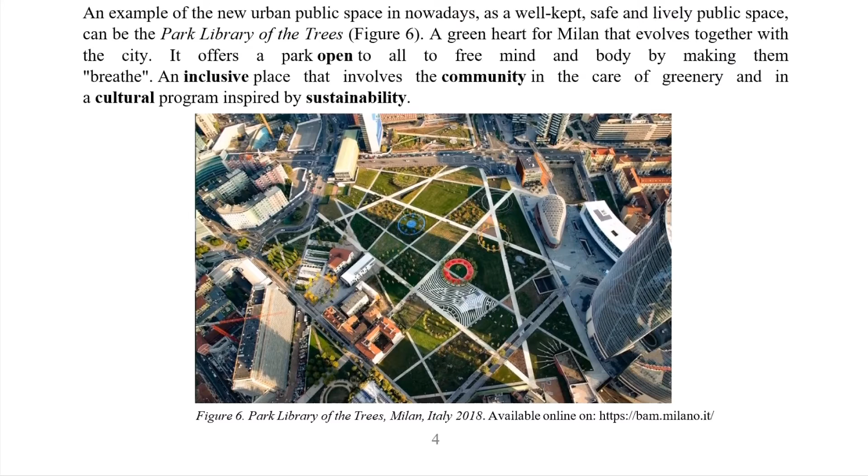Then, an example of a new urban public space nowadays is the Park Library of the Trees in Milan, Italy, that offers an open park, an inclusive place that involves the community in the care of greenery and a cultural program inspired by sustainability.

Chapter 3 talks about rules and functions of urban squares. We can see that functional activities in the square are important for their vitality, and therefore visual attractiveness plays a substantial role.

According to Mumford, the primary function of cities is the acculturation and humanization of its inhabitants, and for this purpose public spaces are the essential tool in the city. Kostof defines some basic functions of urban squares as being part of the transport system, commercial activities, games and sports. In addition, public squares provide citizens with places for leisure and outdoor activities, and also have ecological benefit to the human and urban environment.

Well-designed public squares increase the visual landscape value and contribute to environmental aesthetic value. In addition, urban public squares also provide economic benefit for the community. It's a well-known fact that the existence of open and green areas increases real estate prices nearby. An example is Times Square in New York.

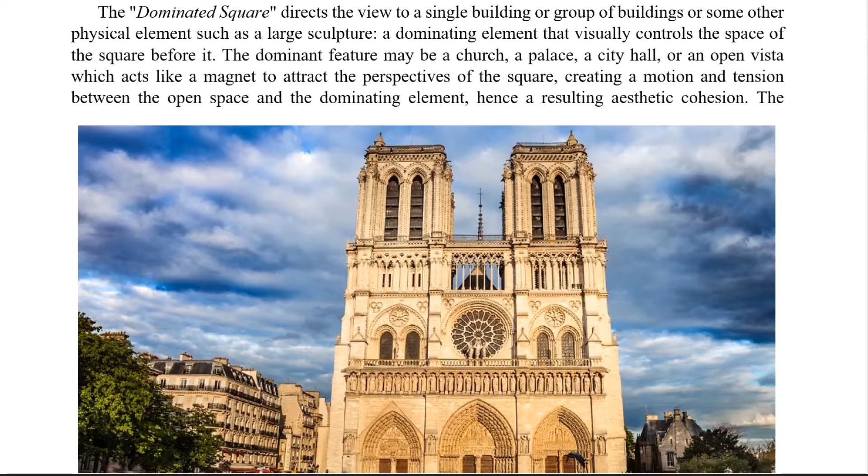This simplest form of public square is closely related in design to the architectural concept of the atrium of a Roman house. Another category is the dominated square, in which the dominant feature can be, for example, a church, a palace, or a city hall, or, for example, an open vista, which acts like a magnet to attract the perspective of the square. For example, we can take the Notre Dame Cathedral and Parvis of Paris.

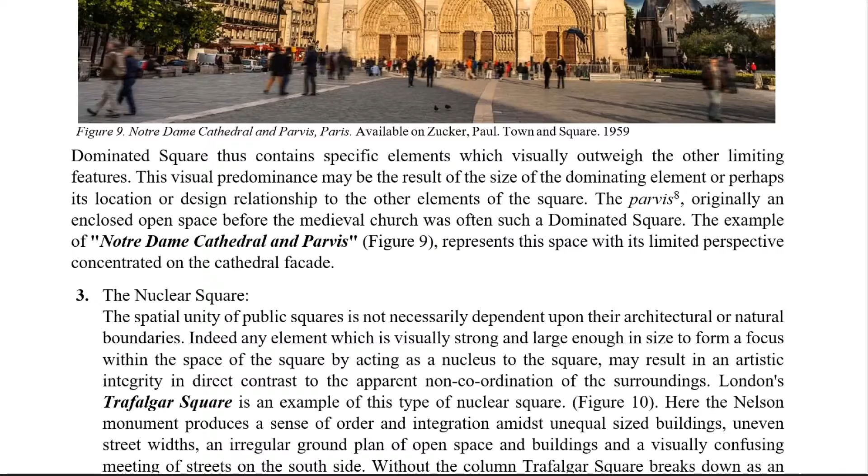The third category is the nuclear square, in which the spatial unity of public squares is not necessarily dependent upon their architectural or natural boundaries, but on any element which is visually strong and large enough in size to form a focus within the space of the square by acting as a nucleus to the square. An example is Trafalgar Square in London.

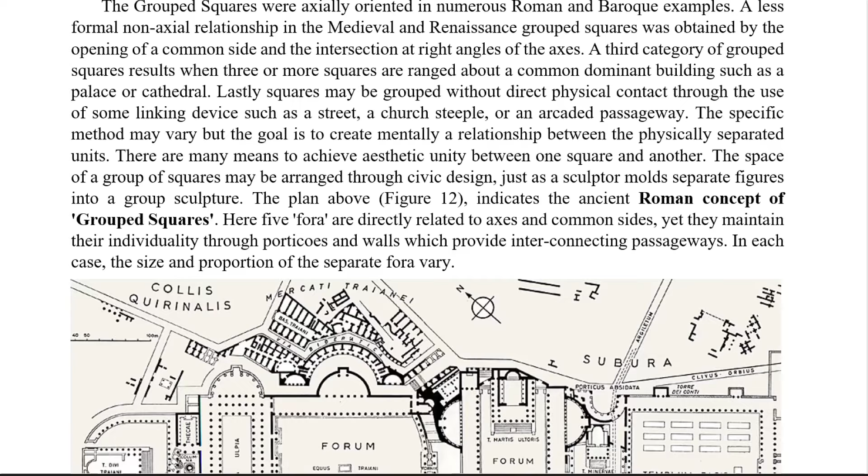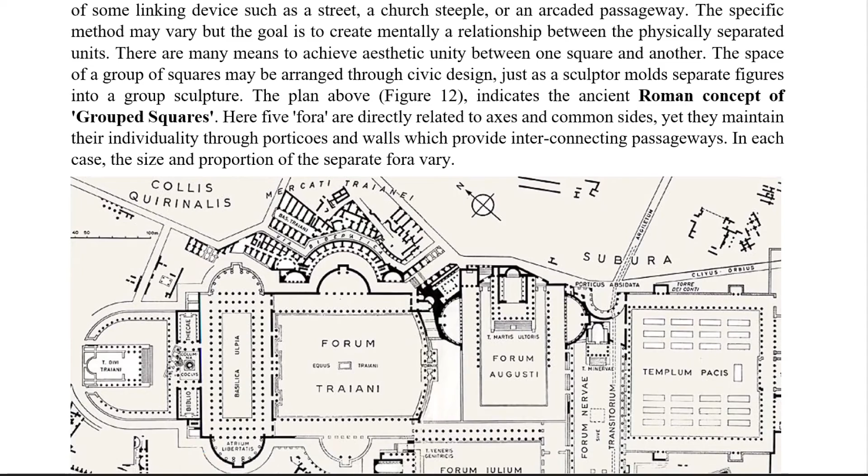And another category is the grouped square. They were axially oriented in numerous Roman and Baroque examples. There are many means to achieve aesthetic unity between one square and another, and the space of a group of squares may be arranged through civic design, just as a sculptor molds separate figures into a group sculpture.

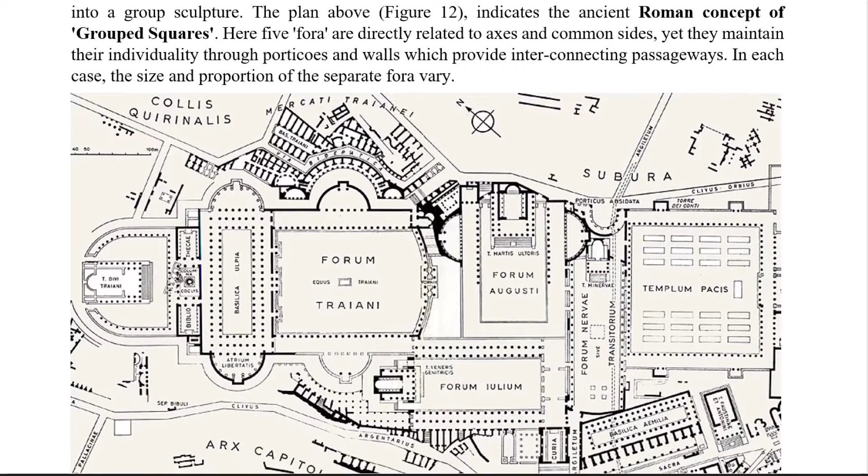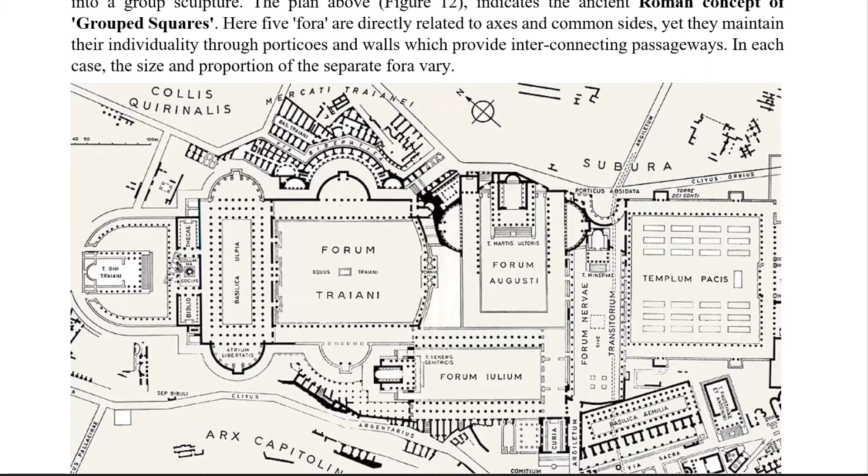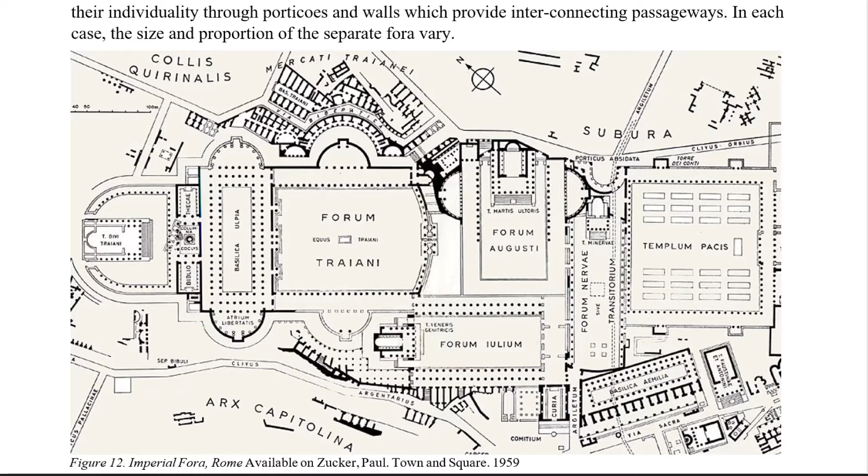This image indicates the ancient Roman concept of grouped squares, in which five forums are directly related by axis and common side, yet they maintain their individuality through porticos and walls, which provide interconnecting passageways. And in each case, the size and proportion of the separate forums vary.

The last category is the amorphous square, a term used to describe and classify so-called squares which are, from an aesthetic point of view, formless. To clarify the meaning of the term square, it should be noted that many open spaces formally have the title of square, even though they are just a crossroad, such as New York's Times Square.

Not each square can be easily categorized as closed, dominated, nuclear, or grouped, and can be qualified with multiple classifications. We can consider the case of Piazza San Pietro in Rome, Italy, which shows how this plaza can be classified as each of closed, nuclear, dominated, and grouped.

Then we can have a functional classification, in which every square has a number of purposes and social functions that relate to the very ethos of community. Because the social function of the square extends to such a comprehensive range of urban activity, a functional classification has been devised by G.M. Peter.

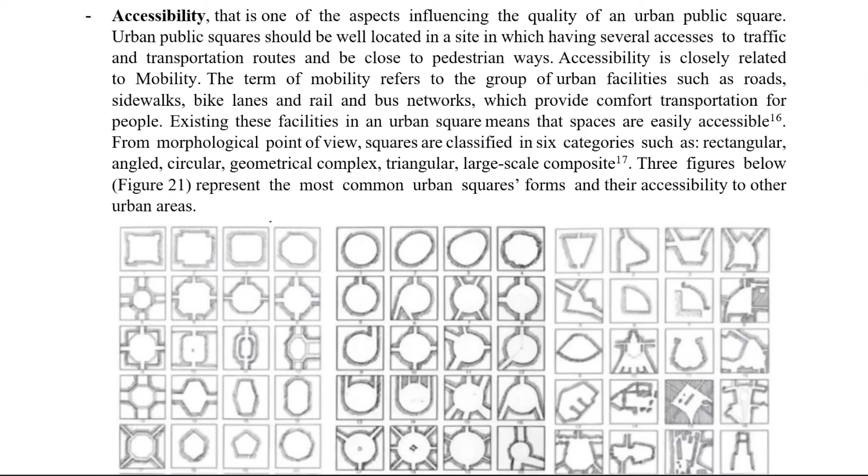Regarding the physical aspect of each urban square, we should consider the size, the accessibility, the furniture, and the beauty. In terms of ecological aspect, due to the rapid growth of urban communities, the issues of microclimate and temperature in urban public space have been influenced. So ecological aspects are important in designing urban squares because they are very vulnerable to weather conditions.

This means the usage of urban squares is dependent on users' thermal comfort, wind comfort, and sun comfort. Since a square is ecologically comfortable, it can attract visitors and users and consequently give benefits to city life. So the following factors represent the ecological aspect of sustainable urban squares: thermal comfort, wind comfort, and sun comfort.

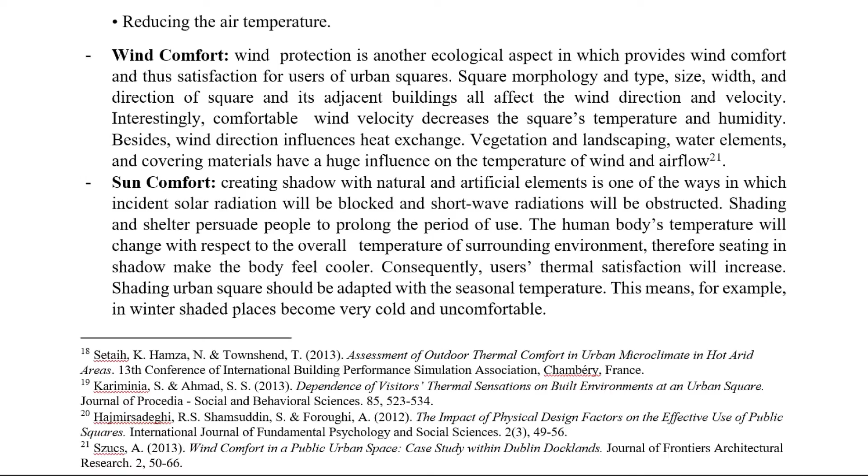Then, when is a square socially sustainable? Social sustainability refers to strategies in which social cohesion and social interaction are emphasized. There are different definitions for social sustainability, such as the ground of equity and democracy, addressing basic needs, and preserving social values and tradition.

However, there is a consensus which introduces social sustainability as a combination of underlying themes, which provide social and human well-being. It's important to know that political and economic situation have also always had a profound influence on social sustainability.

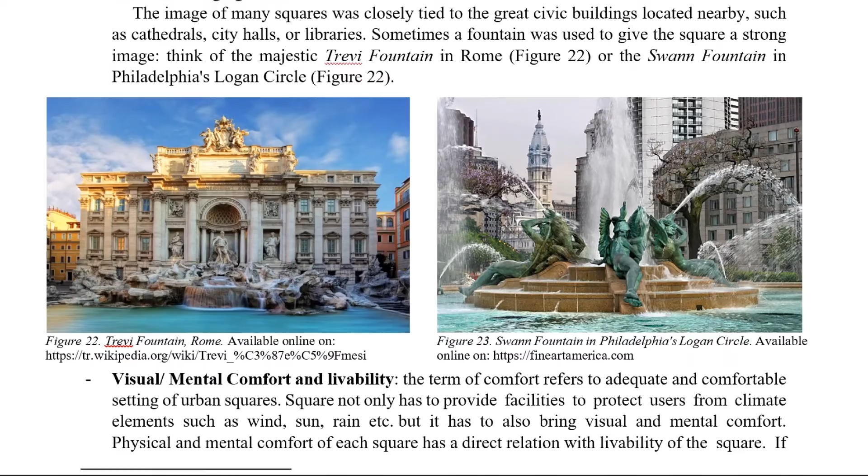To understand the meaning of social sustainability in urban public squares, the following issues are considered: first of all, identity; then visual and mental comfort and livability; and also equality, safety and security, and flexibility in activities.

Now we can talk about when is a square economically sustainable. Urban public squares have also been a tool for subsistence of many people. Well-designed squares are a destination for many tourists, as long as social activities and physical aspects of each square are systematic and useful, the economy of the urban square is more secured.

Urban squares should be commercially oriented to contribute to economical profit and economical growth. In other words, to make sure that the square is economically sustainable, there has to be good management and monitoring to support the diversity of social interaction and physical structures.

Therefore, social, cultural, and ecological aspects of urban squares will lead to vibrant economic development, which is based on local self-reliance rather than government resources. Urban policy makers try to enhance the quality of urban public space and living environment to attract investment and economic boost. The following are some examples around the world about squares that I will better explain in the matrix.

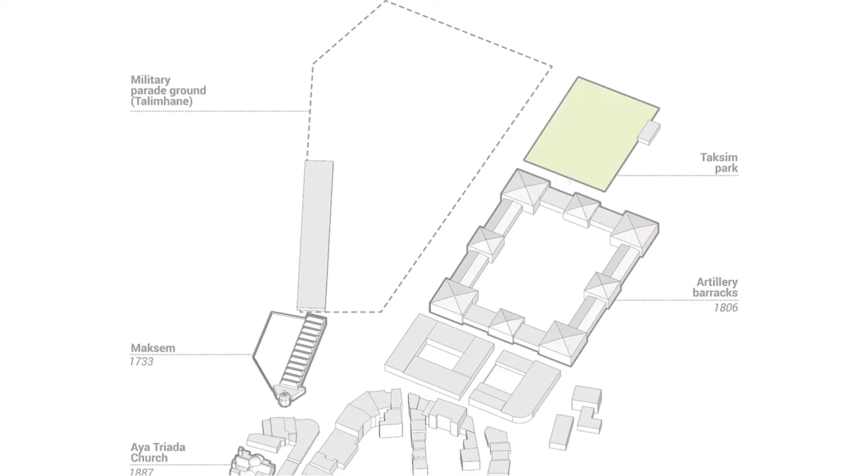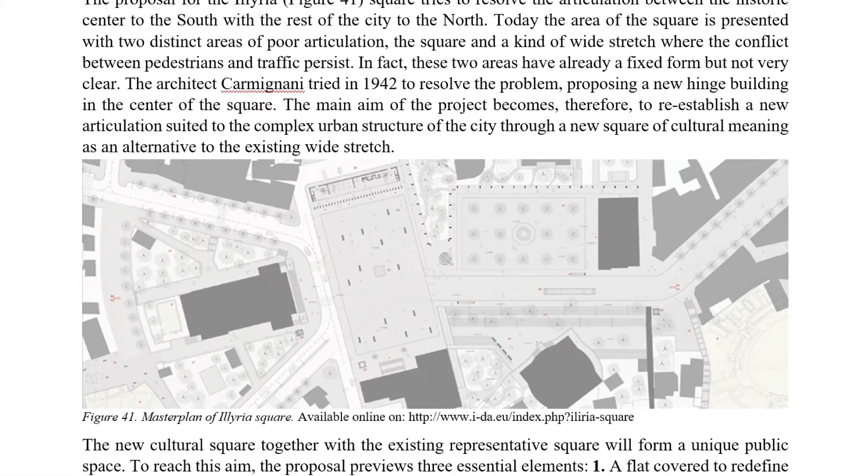Here we can see the images of San Marco Square in Venice, Italy; Piazza di Spagna in Rome, Italy; Taksim Square in Istanbul, Turkey; Red Square in Moscow, Russia; Maidan Square in Ukraine; Illyria Square in Albania; and Eleftheria Square in Cyprus.

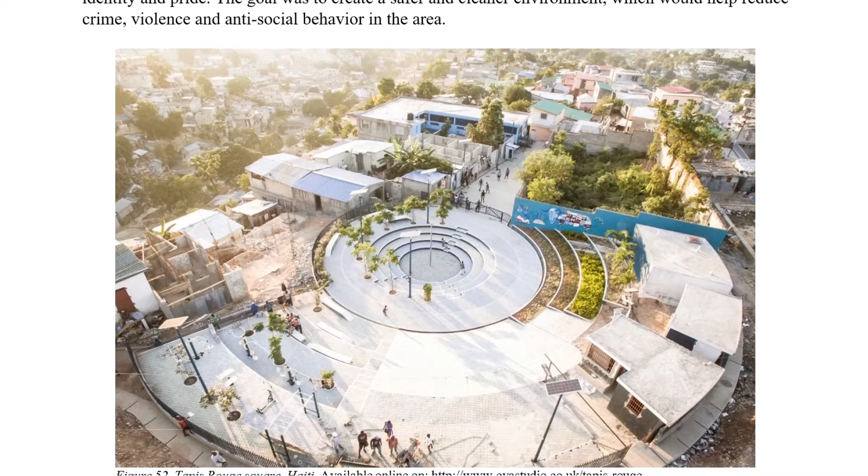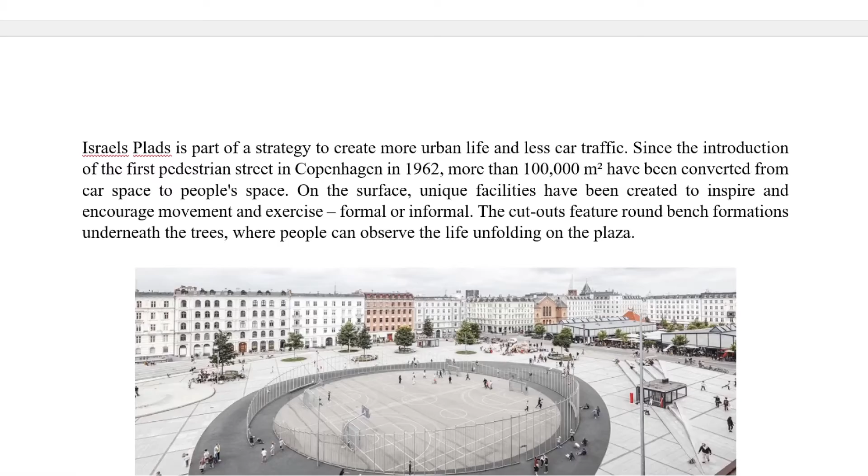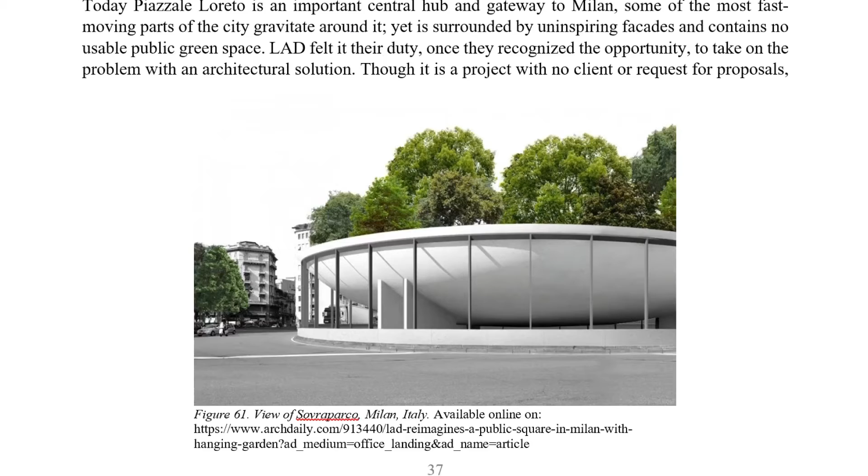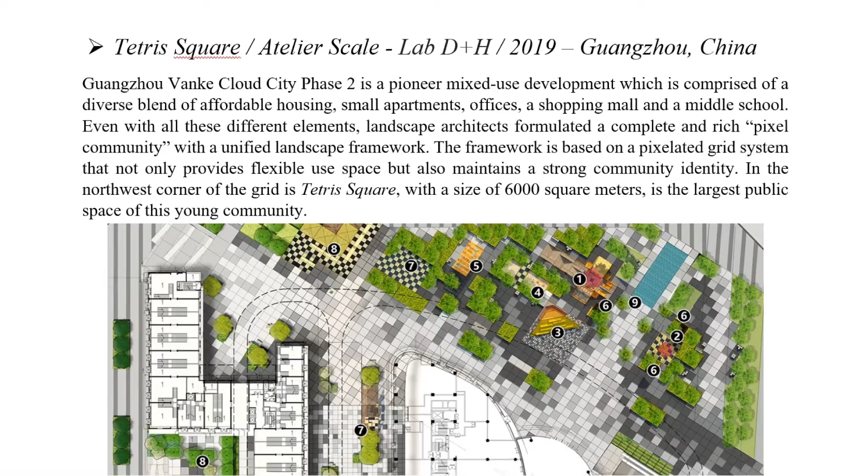Tapis Rouge in Haiti, and Israel Square in Denmark, and Sovraparco, a project in Milan, Italy, Tetris Square in China, and Superkilen in Copenhagen, Denmark.

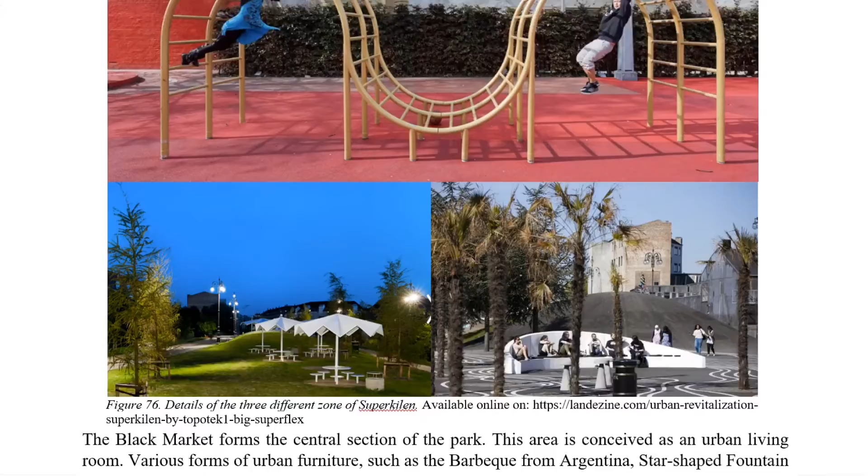Today, as public spaces decline, concerns for the vitality and livability of cities increase. People are the main ingredient of the city, and without public space, it's impossible to establish a physical and mental connection between public and urban environment. So urban public space has been negatively affected by globalization and privatization.

Furthermore, increasing individualism has caused social fragmentation within communities, which presents itself in the changing use of public spaces. Also, the internet has become a major component of our daily lives, and in addition to its economical, educational, and time-saving benefits, it has also dramatically changed public life. The internet has created a virtual environment where people prefer to spend their time rather than going out.

Social relations are necessary for the cohesion of community and local and national identity. In this context, urban public spaces are important venues for creating social relations between people. As one of the significant open public spaces, urban squares are fundamental elements of democratic and livable cities. Therefore, it's needed to recreate and design urban squares to stimulate public life and establish social cohesion.

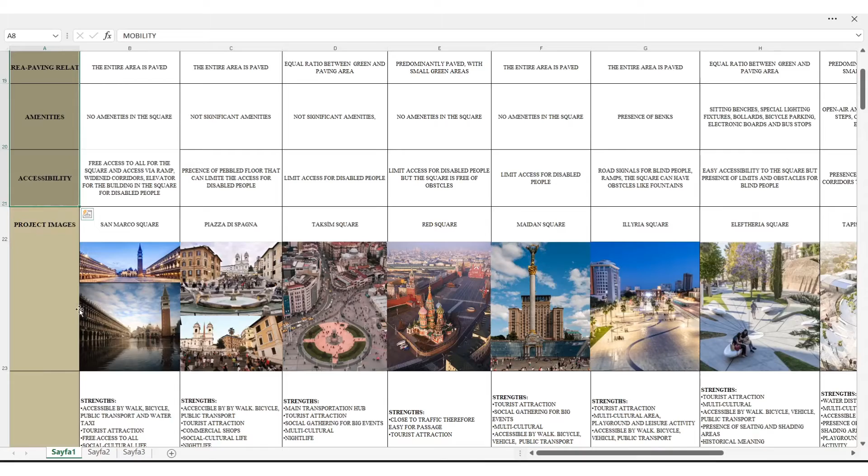In the matrix, I explained all the squares mentioned before with the ecological criteria. Firstly, I identified city, years, and total area. As ecological criteria, I identified mobility, field of use, importance by buildings around, water use, waste recycling management, and energy efficiency usage, then biodiversity, preventing noise pollution, wind comfort, shadow and sun, green area paving relation, and amenities and accessibility. Then I took some images of the project and did the SWOT analysis.

For example, for San Marco Square, we can say that some points of strength are that it is a tourist attraction, has free access to all, and has a social cultural life. Some weaknesses can be the lack of shading elements and seating facilities and elements.

Some opportunities can be, for example, that the location of the square is close to important religious, political, and cultural buildings. And some threats can be the air and noise pollution, and also the square is completely sunny.

For Piazza di Spagna, there are the same ecological criteria and the SWOT analysis.

Some strength points can be the accessibility by walk, bicycle, and public transport. Some weakness points can be the limited access for disabled people and no biodiversity. Some opportunities can be that the location can be improved with more green areas, and some threats can be air and noise pollution.

For Taksim Square, some strength points can be that it is a main transportation hub, and some weaknesses can be that most of the square is concrete material. Some opportunities can be that the location is close to most of the European side of Istanbul, and some threats can be air and noise pollution, and also that the location has limited access for disabled people.

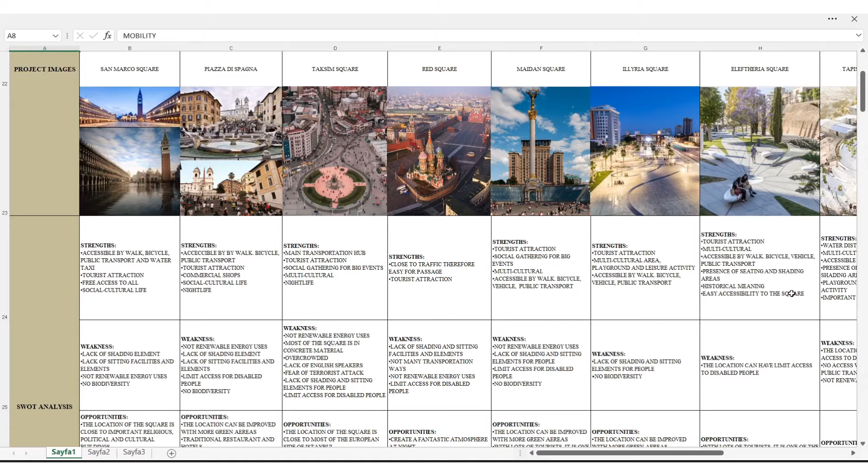For Eleftheria Square, some points of strength can be that it is a multicultural place and has historic meaning. Some opportunities can be that there are a lot of tourists, and it's one of the main tourist attractions of the city.

For Tapis Rouge Square, some points of strength can be that there is a water distribution station, it's a multicultural place, and there are playgrounds and leisure activities.

Some weaknesses can be that the location has limited access for disabled people, and there is no access by vehicle and public transport. For Israel's Square, some points of strength can be that there is a parking area, it is a multicultural place.

Also here there are playgrounds and leisure activities, but there is no renewable energy use. Some opportunities can be that it can revitalize the history of the place.

For the project Sovraparco, some strengths can be that it's an important central hub of Milan, a biodiversity protector from air, noise and sound pollution, and is equipped with stores, coffee shops, and other amenities. Some opportunities can be the social life point, and that it can improve the built environment and quality of air.

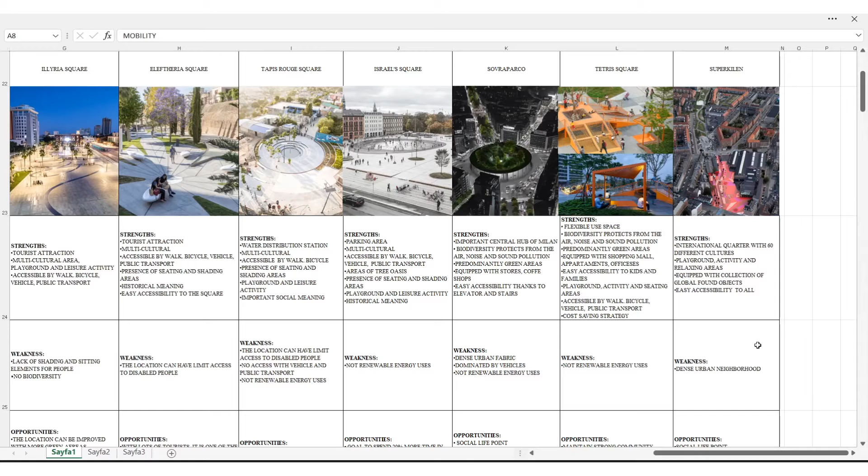The second part of my work concerns the project I made for an eco square, and these are some keywords: urbanism of open space, sustainable open space and square, inclusive and safe space, and suburban district.

Firstly, I mention some information about the urban context, and I talked about Istanbul, one of the biggest metropolitan areas of both Europe and Asia. I mentioned some information about the historical and cultural background of Istanbul, and here we can see an image showing the age of buildings in Istanbul.

Then I talked about the location, Kartal, a big city on its way to becoming a metropolis. We can say it is one of the districts with the largest industrial area of Istanbul, and the transportation opportunities encouraged intensive construction activity since the 1970s. It's a district located on the Asian side of Istanbul.

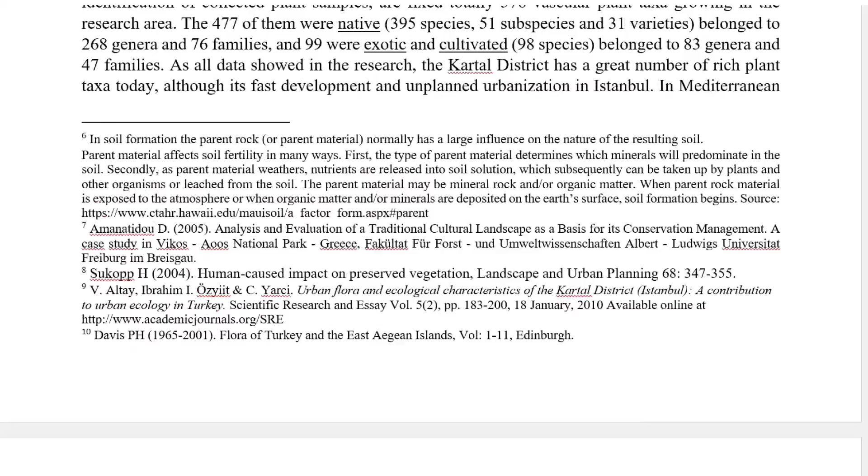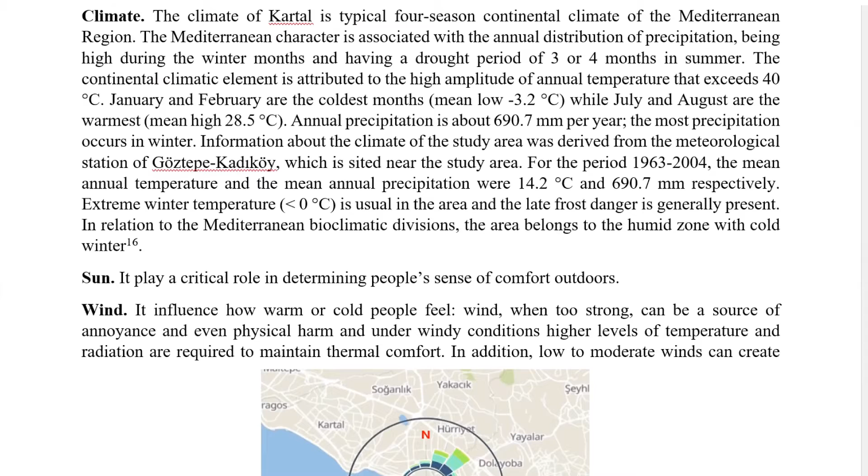Here I talk about the history of Kartal, and I make a site analysis about firstly the population, the topography, the soil, then fauna and flora. There is also information about the climate in Kartal city, so I talked about the sun and wind, and also about the green belt ratio.

Traffic and transport conditions. Then I make a statistical analysis of demography, talking firstly about the population and the age. This is an analysis of demography about the education and the socioeconomic status, and finally the citizens' distributions.

For my project report, I firstly talk about philosophy. Over the next few decades, more and more people will migrate to cities, and with the growing number of urban dwellers come many challenges, such as congestion and pollution. In this vision, suburban districts will continue to exist, and suburban living continues to appeal to many owners, and people will still want to live in them. So a redesign of them is needed.

But times are changing, and developers are responding with extensive infrastructure retrofits that encourage new growth in older neighborhoods and smarter growth in new neighborhoods. From an urban standpoint, a balance of supply and demand of workplaces is needed.

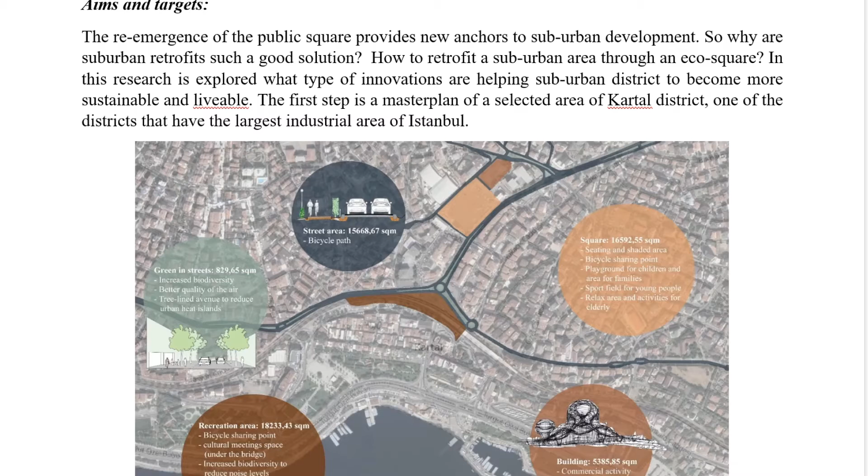So why are suburban retrofits such a good solution? How to retrofit a suburban area through an eco square? In this research, I explore what types of innovation are helping suburban districts become more sustainable and livable.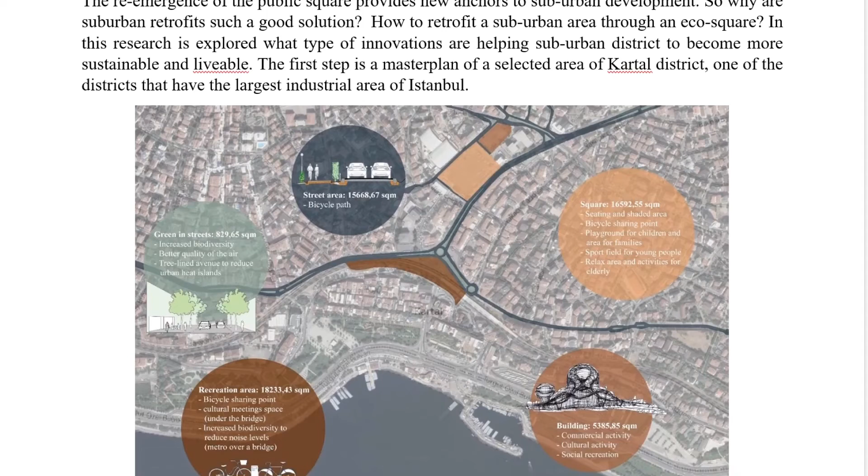The first step is a master plan of the selected area of Kartal district, one of the districts that has the largest industrial area of Istanbul.

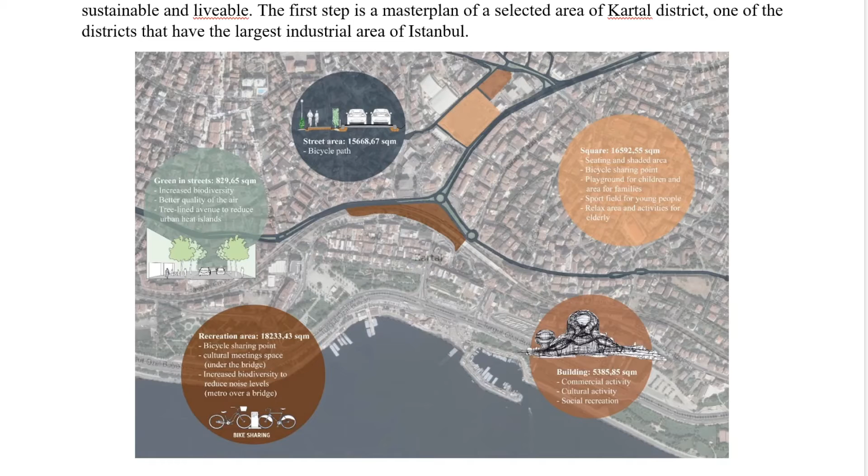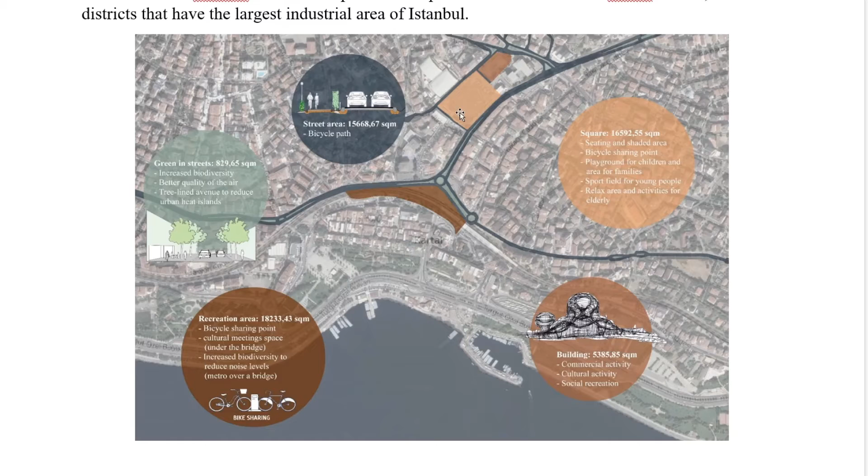Here we can see the master plan with some areas that I selected. For example, this area can be a recreation area, and also this area can be the Eco Square. So I developed in particular the Eco Square, and these are the first sketches of the idea.

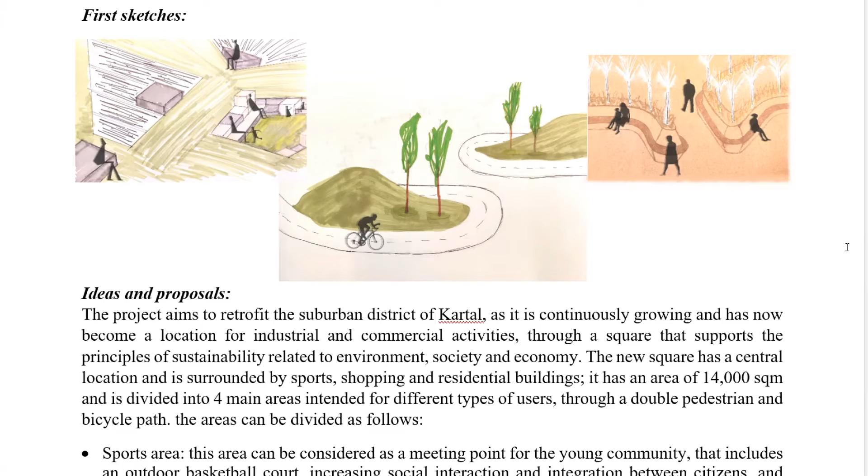The project aims to retrofit the suburban district of Kartal through a square that supports the principles of sustainability related to environmental, society, and economy.

The new square has a central location and is surrounded by sport, shopping, and residential buildings. It has an area of 14,000 square meters and is divided into 4 main areas intended for different types of users through a double pedestrian and bicycle path.

The area can be divided as follows. This is the program summary. For example, firstly, we can have the playground area that includes 2 different play areas: one containing games designed for children aged 3 to 6, and the other for children aged 6 to 12. They can play on different textures of pavement, for example rubber flooring and stabilized soil.

The idea is to revitalize the area, creating an inclusive playground that is comfortable and safe for citizens, and in particular for families, providing shady and rest seating areas with different trees resistant to air pollution to improve functionality, aesthetic aspects, and biodiversity.

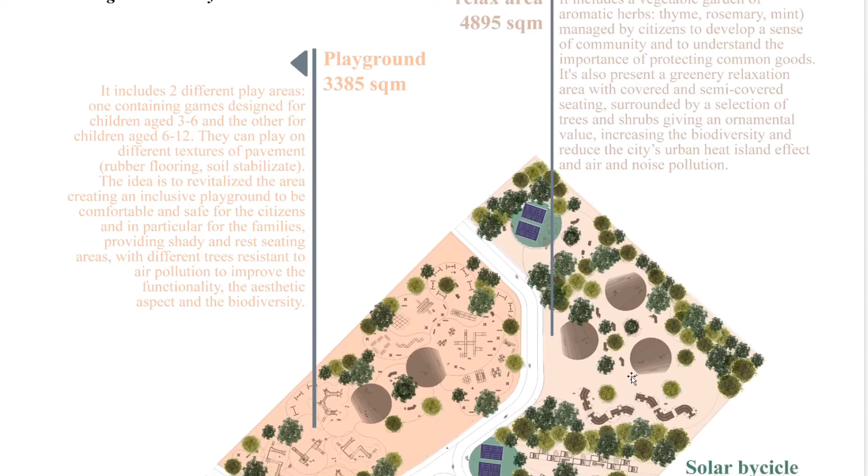Another area is this one, an area for the elderly and a relaxed area. It includes a vegetable garden of aromatic herbs managed by the citizens, to help understand the importance of protecting common goods.

It also has a greenery relaxation area with covered and semi-covered seating, surrounded by a selection of trees and shrubs, giving an ornamental value, but also increasing biodiversity and reducing the city's urban heat island effect and air and noise pollution.

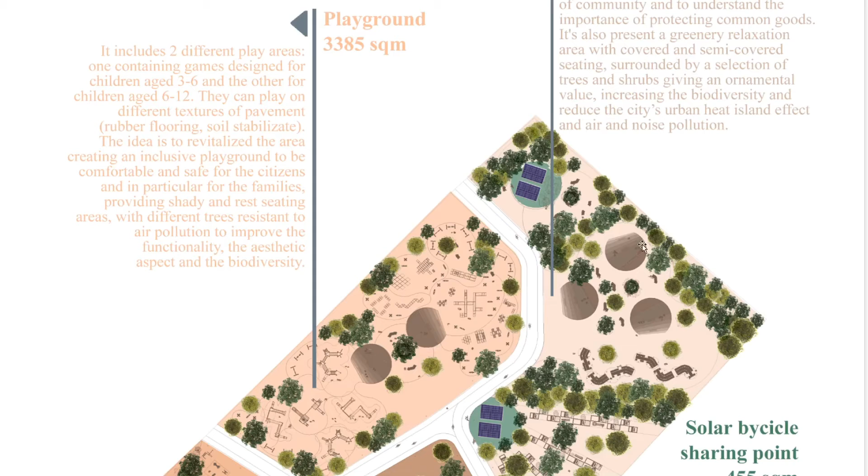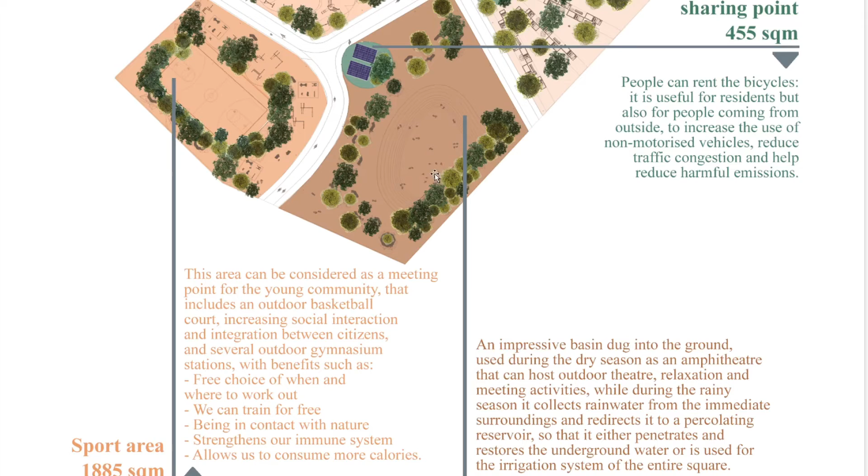Another important area is the recreative area. Here is present an impressive basin dug into the ground that is used during the dry season as an amphitheater that can host outdoor theater, relaxation, and meeting activities, while during the rainy season it collects rainwater from the immediate surroundings and redirects it to a percolating reservoir so that it either penetrates and restores the underground waters or is used for the irrigation system of the entire square.

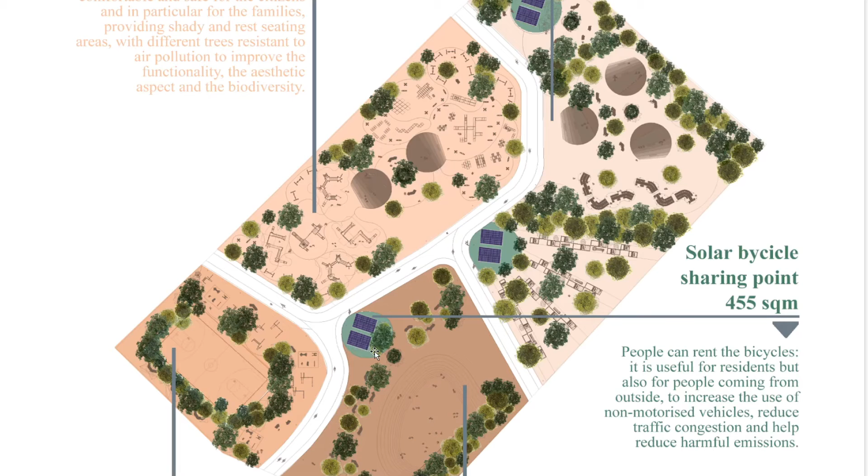In the square are also present 3 solar bicycle sharing points, in which people can rent bicycles. So it's useful for residents, but also for people coming from outside, to increase the use of not motorized vehicles and reduce traffic congestion, and also help reduce harmful emissions.

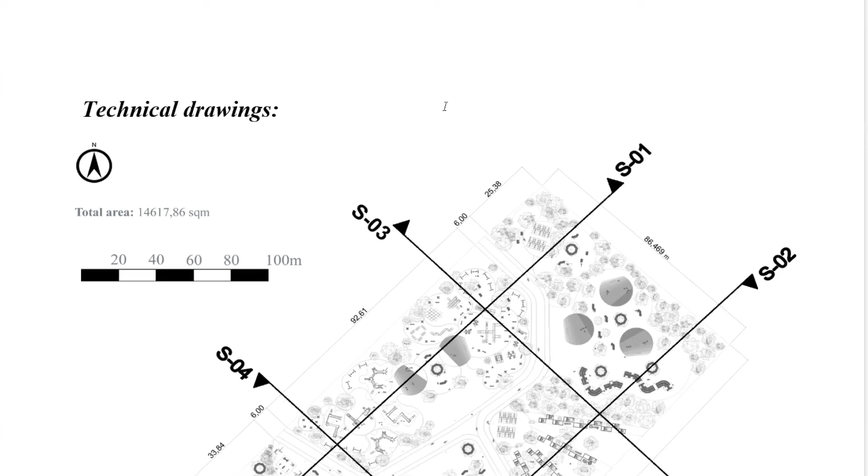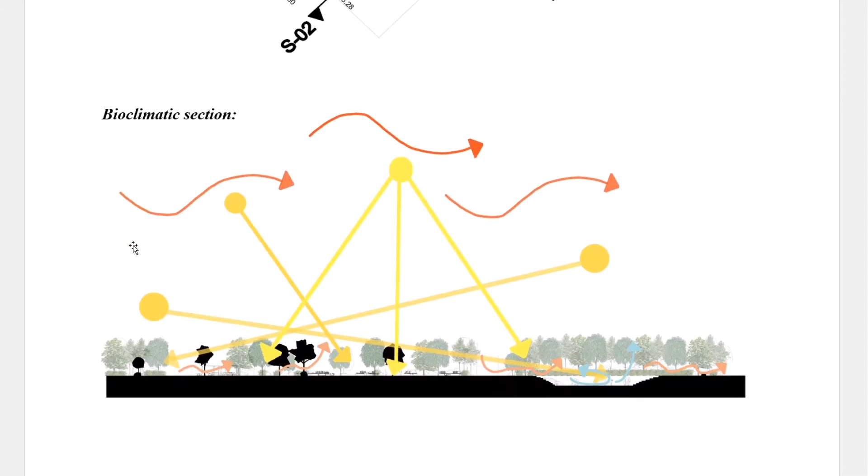Then here we can see some technical drawings. This is the plan of the total areas. And here we can see the bioclimatic section and the four sections of the area.

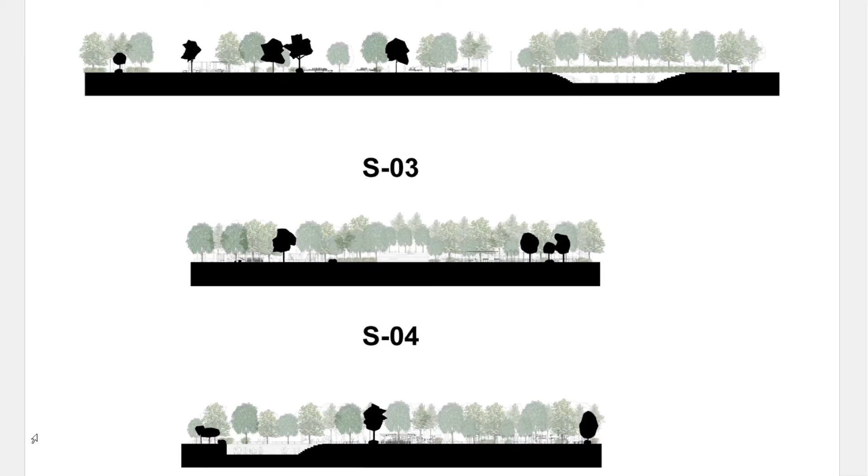So about the ecological application. Firstly, we can talk about the flora. As I said, present in the area are some evergreen trees, like Acer campestre and Platanus orientalis, and some deciduous trees, like Celtis australis, and also fruit trees and shrubs.

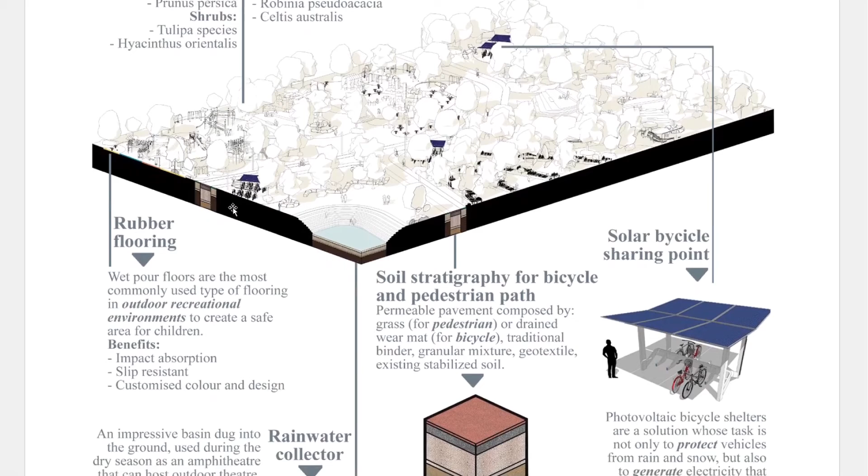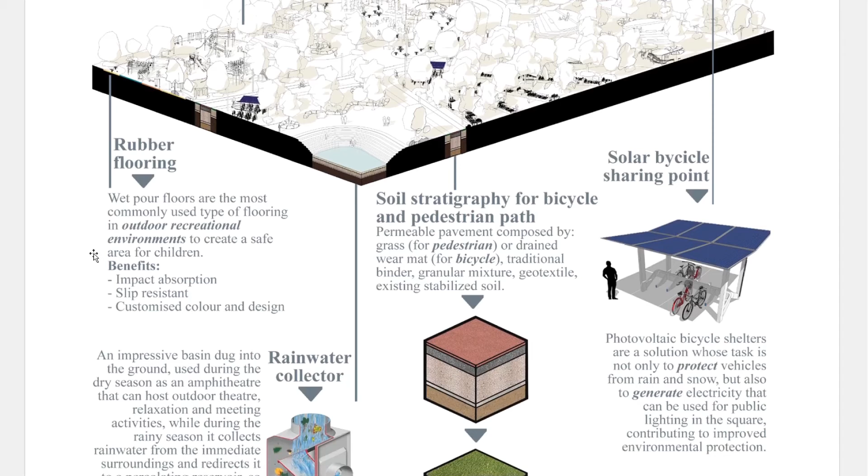Then, in the area of playgrounds, is present a rubber flooring, in which wet pour floors are the most commonly used type of flooring in outdoor recreation environments to create a safe area for children. The benefits can be, for example, impact absorption, customized color and design, and slip resistance.

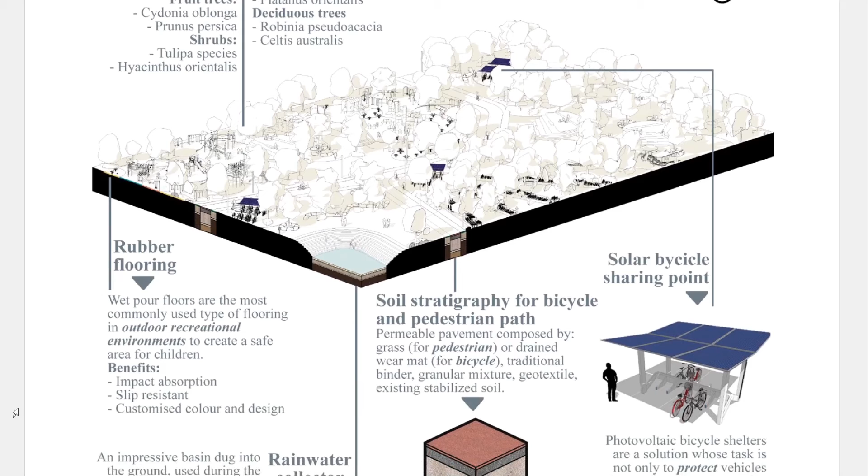Another important point are the solar bicycle sharing points. So we can say that photovoltaic bicycle shelters are a solution whose task is not only to protect vehicles from rain and snow, but also to generate electricity that can be used for public lighting in the square, contributing to improved environmental protection.

This is the soil stratigraphy for bicycle and pedestrian paths. We have the permeable pavement composed by grass or by drained mat for bicycles. And then here we can see the detail of the rainwater collector.

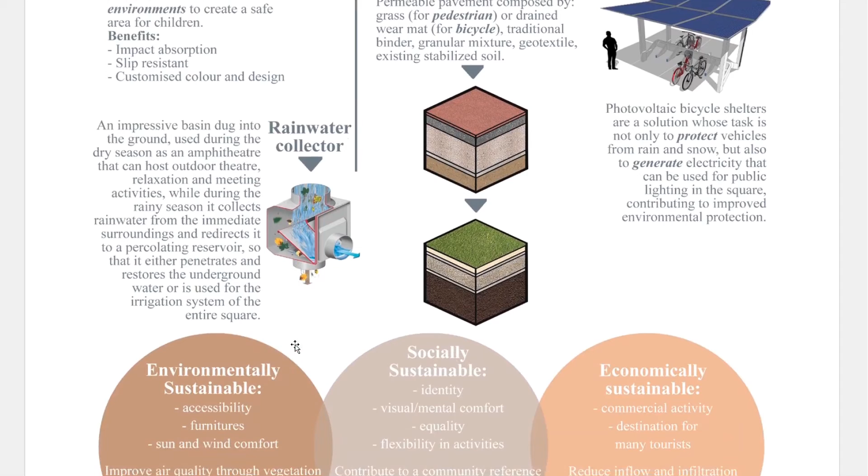So we can say that the ecological application regards environmental sustainability because there is accessibility for sun and wind comfort, so to improve the air quality through vegetation that can clean water and air, but also provide climate regulation like reducing the urban heat island effect. And all these applications regard also social sustainability because they contribute to a community reference point, enhancing the attractiveness of a site or neighborhood and serving as a source of pride for the community. And also regards economic sustainability because it reduces inflow and infiltration into sewer lines otherwise bound by increased costs of wear, tear, and repair.

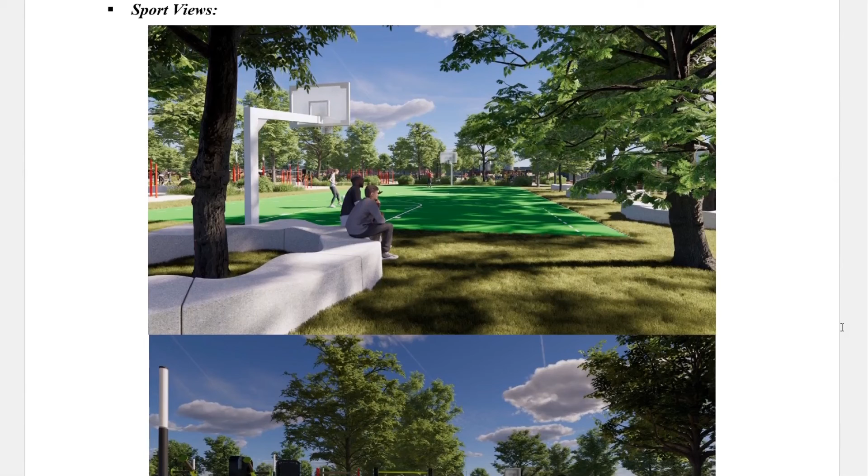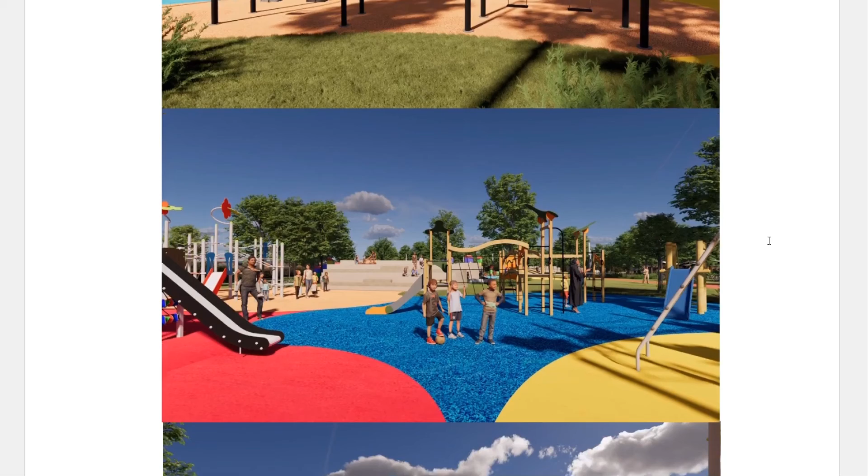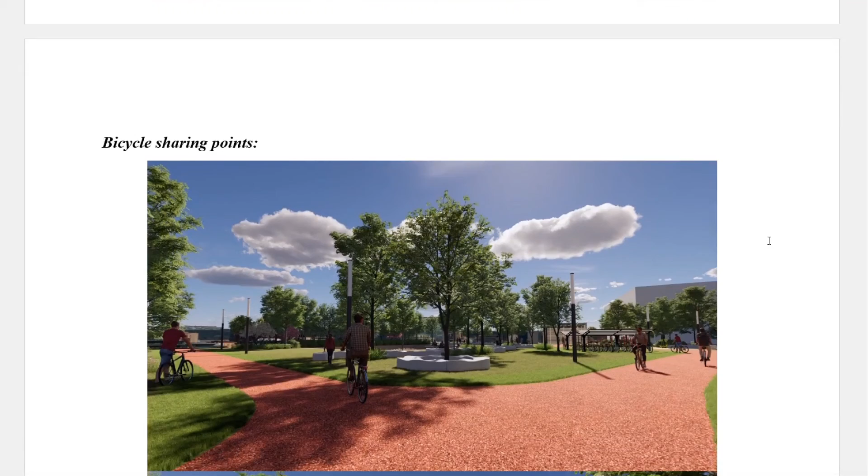And finally, these are some views of the total area. In particular, we can see the sport area, the playground area, and the bicycle sharing point with the pedestrian and bicycle path.

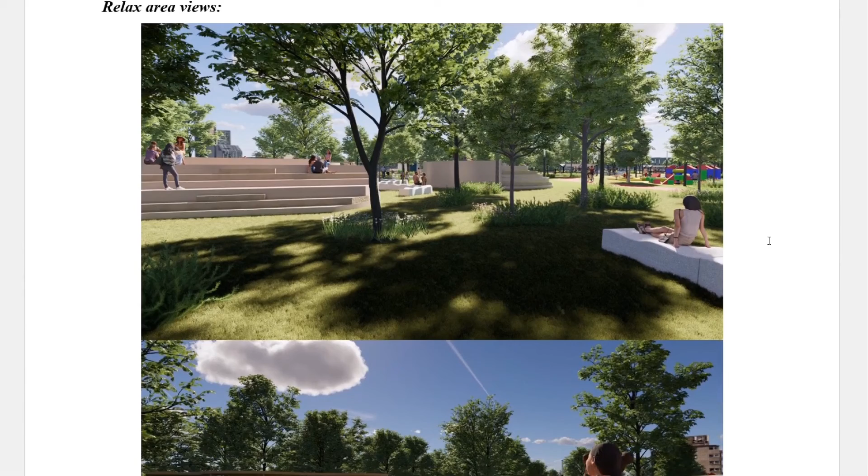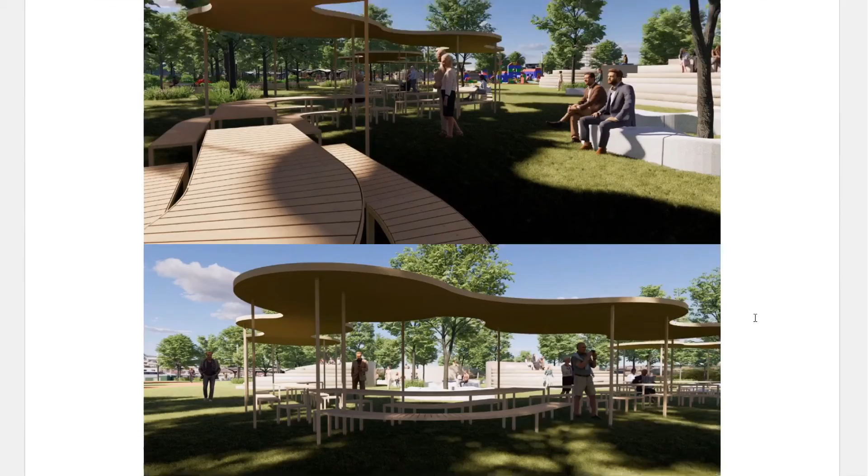Here we can see some views of the relax area and then the elderly area with some covered and semi-covered sitting areas, and with the view onto the vegetable garden.

So I can say that in this report, the concept of sustainability applied to the suburban environment of a city was analyzed. We can understand that environmental, social, and economic sustainability is a focal point in the current days. And the suburban tissue is important because it provides a clearer picture of the dynamic of the built environment of the suburbs, where different tissues change at a different rate and scale.

So, sustainability principles should be integrated into urban planning, creating environmental awareness for professionals but also for users. And certainly, one of the public spaces that has been used since antiquity and that can contribute to the re-emergence of suburban districts is the public square, which must represent the heart of the city identity and the meeting space for its users. So, urban public squares are more than just physical spaces.

As I said, they have symbolic meaning for people. They are vibrant, active, and interesting places. In addition, most contemporary urban squares involve historical value or importance for the community, as well as for tourists and visitors. So we should realize that urban public squares are essential for enhancing city image and community development.